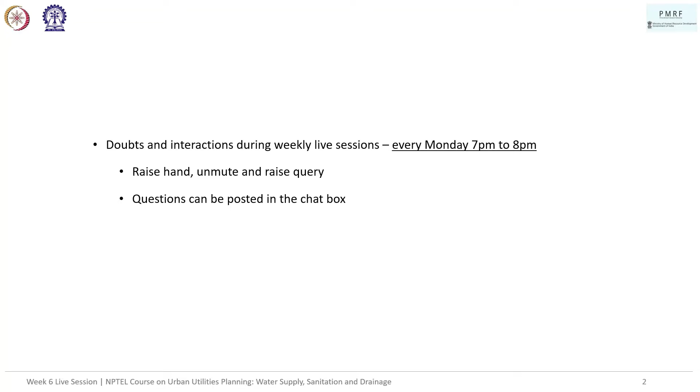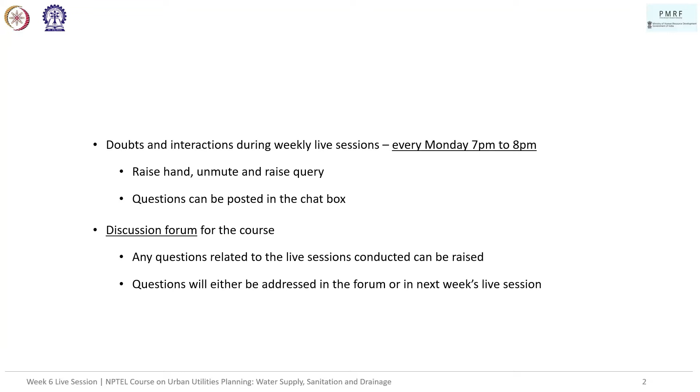So, a very brief recap of what happened in week 6 of the course, which was on water quality testing and treatment. The first two lectures covered concepts on potable water, impurities in water, physical and chemical quality of drinking water, bacteriological guidelines, recommended treatment for various sources, and sampling procedures for testing. We also looked at physical analysis, chemical analysis, and biological tests in measuring water quality.

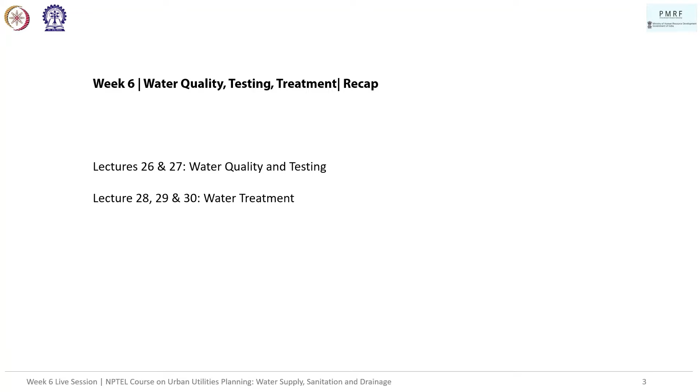The next three lectures focused on water treatment. We looked at treatment methods, sequence of treatment units, water treatment plants and their structure, and individual components such as screening, aeration, plain sedimentation, coagulation, flocculation, and clarification, as well as a third lecture on filtration, disinfection, and other treatment methods. We also saw a case study.

In this session, we'll be looking at a few assignment questions from the previous round of the course corresponding to the same week. This week it's been mostly theoretical, we don't have any major numerical questions. So I would request you to participate more in the class so that we can have an actual interactive session. Try to answer the questions.

Try to recall what has been taught in class, and even if you don't know, the great thing about water supply and sanitation that I personally found very useful when learning was that a lot of it actually depends on common sense. If you visualize it and keep a sequence in your mind, it's extremely easy to remember. So even if these interaction sessions aren't graded, just wonder what the sequence can be, or what the answer can be, or what the process of treatment can be, where it logically falls.

Then I think you would be able to answer both the ones here and in general pertaining to water supply, especially the treatment sequence part. So please make sure you send in your responses in the chat box so that it's easier for me to keep track also.

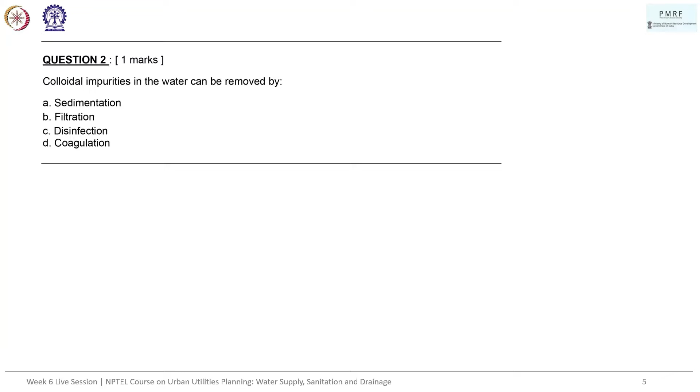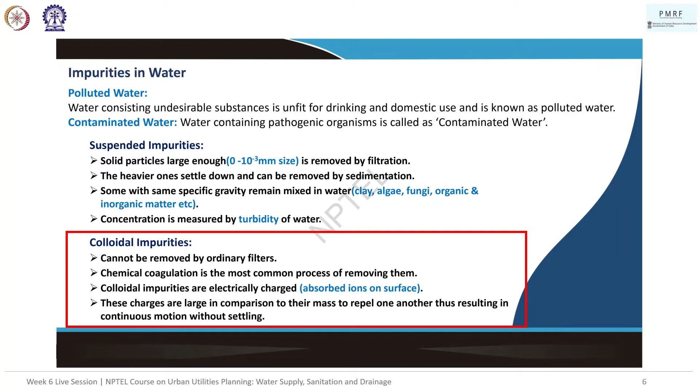So the answer, as we can see from the slides on colloidal impurities, is coagulation. You're both absolutely right. Coagulation basically depends on some sort of additional chemical being added, which is usually alum, and that's our answer.

The issue with colloidal impurities is twofold. One is their size, but even if the size is not the issue, it's about the charge that they carry. So even if you allow them to settle down, they will be in constant movement, similar to Brownian motion. These particles keep repelling away from each other because they're all of the same charge, and that is where the issue with settling down comes from.

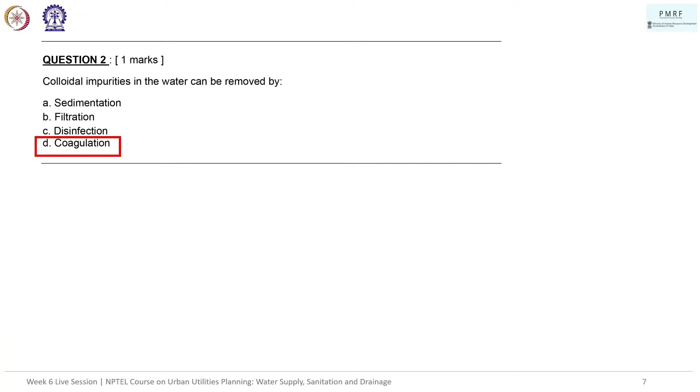Moving on to the next question. For this lecture, feel free to interrupt me anytime, since most of it is theoretical. I don't think we should have a problem with interruptions.

According to CPHEEO, what should be the acceptable pH of the drinking water? We have four options: 6.5 to 7.5, 6 to 8, 7 to 8.5, and 7.5 to 9.

C, 7 to 8.5. Okay. Anybody else?

You are absolutely right, Miss Supriya. The answer is 7 to 8.5. As Sir had also mentioned, there is a gray area between the acceptable and the rejection range. So 7 to 8.5 is the acceptable range, however less than 6.5 or more than 9.2 is the rejection range.

What happens is there is a gap between 6.5 and 7 - these are the tolerable limits. If you remember how Sir had explained, this gap is sort of not okay, but all right, let's tolerate this much of a deviation.

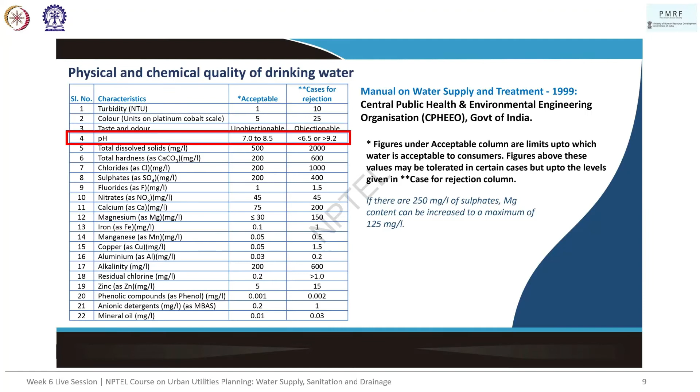We don't go beyond 8.5, I mean the maximum is 9.2. So usually alkaline water, what they refer to as alkaline water, is also within this range. But in the assignment question, the range given is 7 to 10, 7 to 18, 7 to 14, 7 to 15. So it was a bit confusing for me.

That's why - which assignment? Current assignment this week only, question number 15. One second, I'm opening the assignment, Assignment 6, week 6.

They're asking about the complete range of alkaline water - any water that is alkaline. So there is alkalinity - is it alkaline or not? Yes, 7 to 14 is alkaline, right? But what is the acceptable range within that alkalinity is 7 to 8.5.

I thought you meant - oh, generally there are people in marketing of water who claim alkaline water is good for you and package it as alkaline water. I thought you meant we were talking about that. But in general, when you talk about the range of alkalinity, it's 7 to 14 - that's the full range.

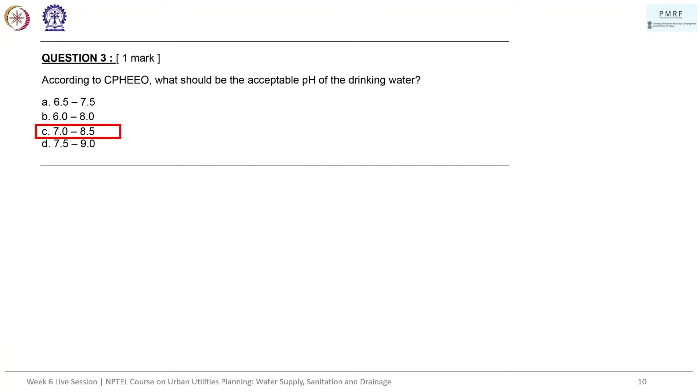The acceptable value and the range - yeah, full range is 0 to 14. Okay, got it, thank you. So next question.

Which physical property of water is measured by nephelometer? A. Turbidity, B. pH value, C. Total solids, and D. Taste.

Any answers? I guess it's turbidity. Okay, we have one answer, turbidity. Anybody else in the chat box? Okay, the answer is turbidity.

If you remember from the slides, we spoke about how nephelometers are used for measuring turbidity. It basically uses the intensity of reflected light to measure the degree of turbidity. But please keep in mind that nephelometers are actually available for both air and water. Essentially, nephelometry is the term used to refer to detection of light energy scattered or reflected towards a detector that is not in the direct path of the light transmitted.

So whenever you transmit light, the essential measurement logic is you measure reflected light - whatever is scattered by the constituent particles. That is how you essentially look at nephelometry.

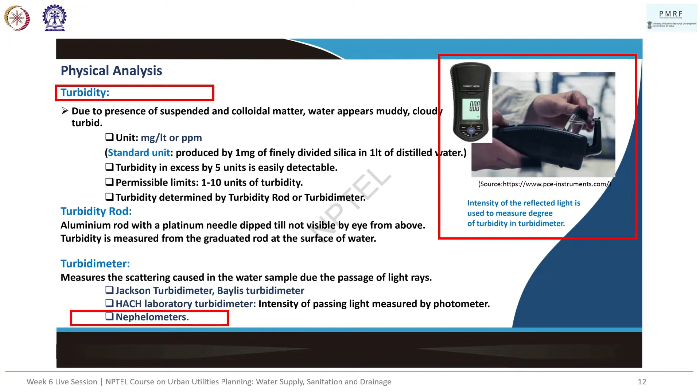Nephelometers have a provision where you can enter what type of particle you have in the suspension, but there is also a generic option where you can measure turbidity even without knowing what the cause of turbidity is or what kind of suspension it is. So the answer is A, turbidity.

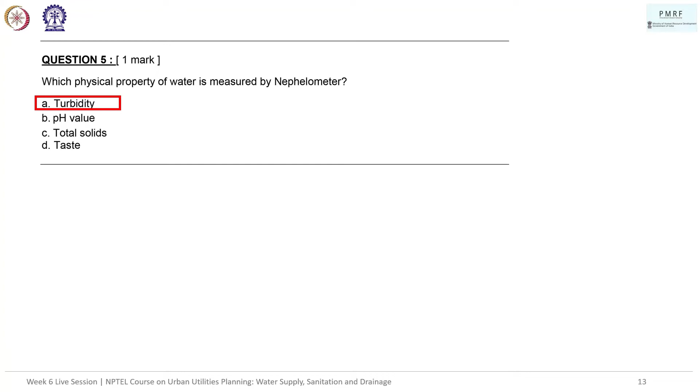So, can I get an answer for just photometer? What do you think photometer is actually used to test for? Color. Okay, color, yes, we have two answers, both right, absolutely right. We use it to test for color.

Let's go to the slide. Photometer essentially measures in platinum cobalt units. Whenever we are setting the standard unit for these measurement devices, even turbidity for that matter, the standard unit, like one PCU or one NTU, is measured based on some basic component that the international standard has set. In this case, platinum cobalt happens to be the standard used for measurement, so it's called platinum cobalt units.

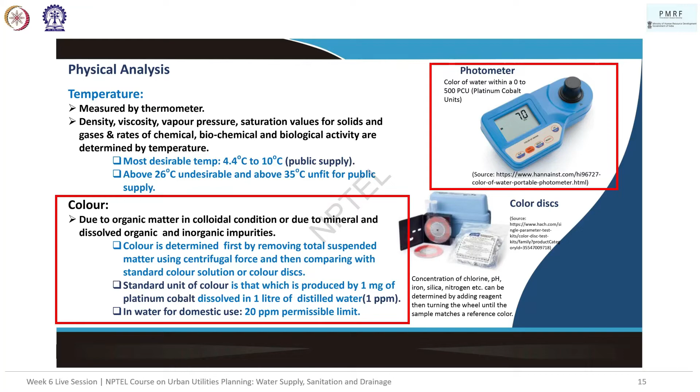The second part is the use of the starch iodide test for chlorine. This slide is actually quite uninformative in the sense that we don't know how a starch iodide test works, so let's take a look at what the test actually is.

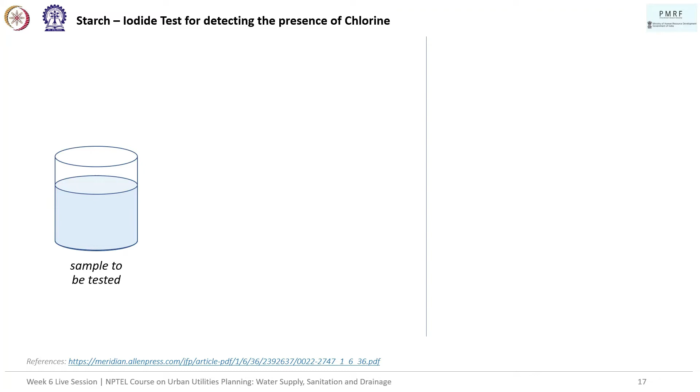Whenever you have a sample to be tested, what are you testing for? You're testing for the presence of chlorine. So you add a combination of some starch and potassium iodide into the water that you want to test for chlorine. If there is chlorine, the water turns blue. If there is no chlorine, the water doesn't turn blue.

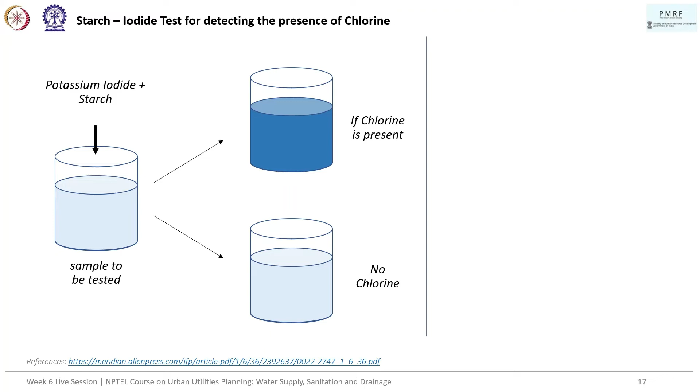What is the mechanism behind this? Essentially, when you add potassium iodide to water, if there is chlorine present, if you remember from school science, there is something called a reactivity series. Say there are two components, A and B, and if A is higher in the reactivity series than B, then if you introduce a compound of B into A, it will be replaced.

So in this case, let me take my pen. Chlorine is actually higher in the reactivity series than iodide - basically, its capability to react with anything is higher than iodide. So as soon as you add potassium iodide into the solution, if there is any chlorine present, the chlorine will replace the iodide. We'll end up getting potassium chloride salt, and we'll have ions in the water.

It so happens that whenever you have iodine ions and there is starch present, this combination gives you that blue color. So this blue color is actually arising from the emergence of the iodide component - I'm sorry, here it is chloride and iodide actually, because they're ions, so Cl minus and I minus.

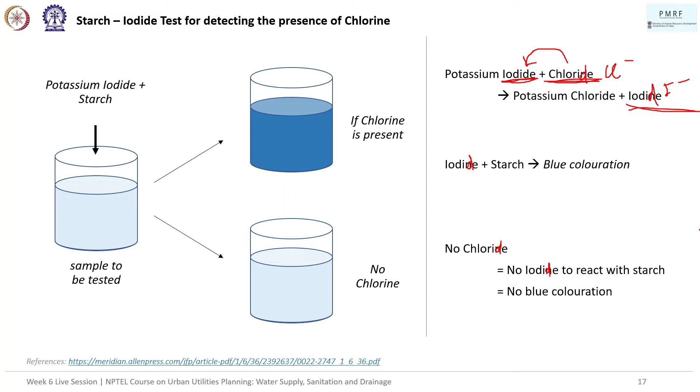When you detect the presence of chlorine, the quantity is further determined based on the number of ml of thiosulfate required to remove the blue color. So when you titrate, you keep adding thiosulfate to the solution till it stops being blue, and then you multiply it by 0.355. That gives the quantity of chlorine present in the water sample in milligrams per liter.

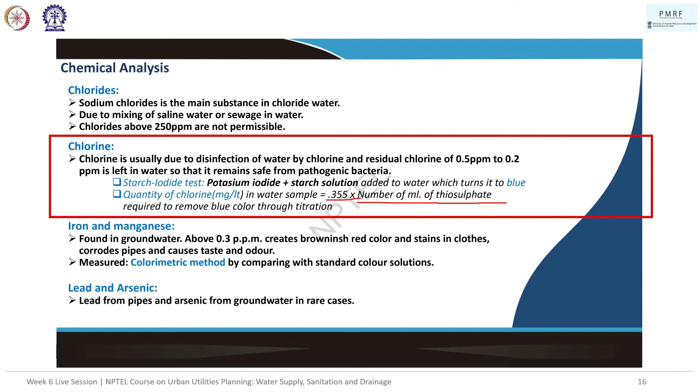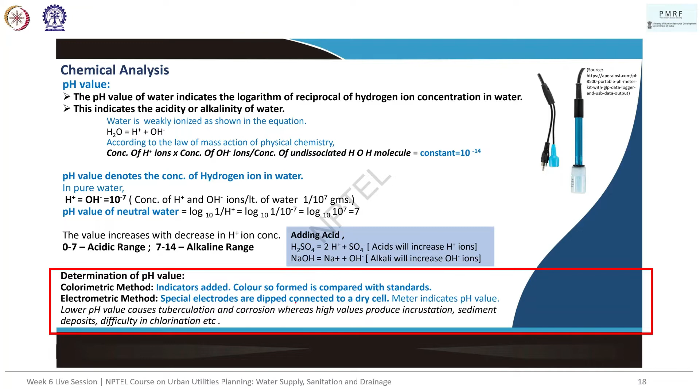So that's a basic introduction. pH is measured with the electrometric method, where you dip electrodes into the water and connect it to a dry cell, and the meter gives you the pH value. Dissolved oxygen is measured through a DO meter.

So, as you said, photometer is for color. Starch iodide test is to test the presence of chlorine, like we saw. Electrometric method is for pH, and dissolved oxygen meter is for oxygen. So the answer happens to be B.

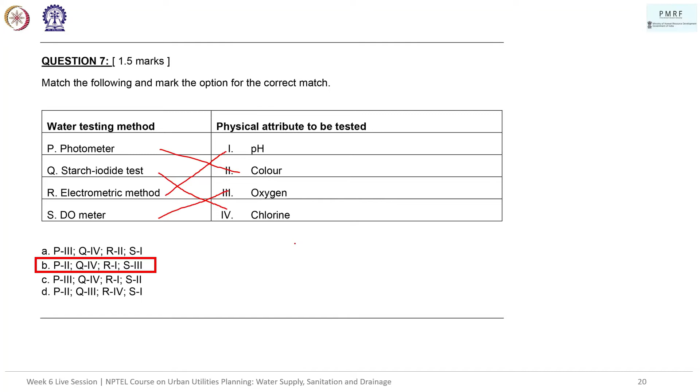Any questions till now? No, go ahead. Okay, all right.

Next question: the presence of nitrogen in water mainly indicates presence of organic matter and bacteria, dissolved gases, suspended impurities and ammonia, or organic and inorganic material. It's C, suspended impurities and ammonia.

Okay. Any other answers?

Let's look at what the presentation talks about. Nitrogen actually indicates the presence of organic matter and bacteria, which is also, by extension, living organic matter. So that's our answer for this question.

In fact, by figuring out what kind of nitrogen component is present in the water, we can determine what stage of decomposition is present, or how much oxidation has happened to this organic matter.

So we can have free ammonia, which indicates the first stage of decomposition or contamination having happened very recently. Then we have nitrates, which are allowed in a very small amount. Nitrites are absolutely not supposed to be present in water.

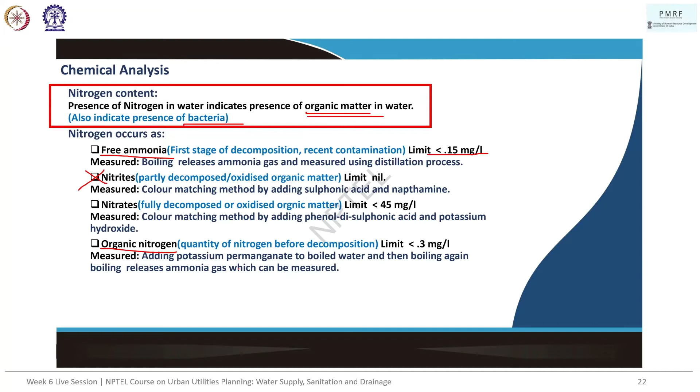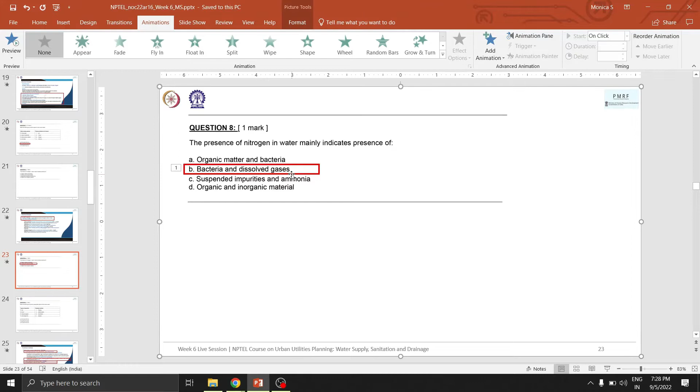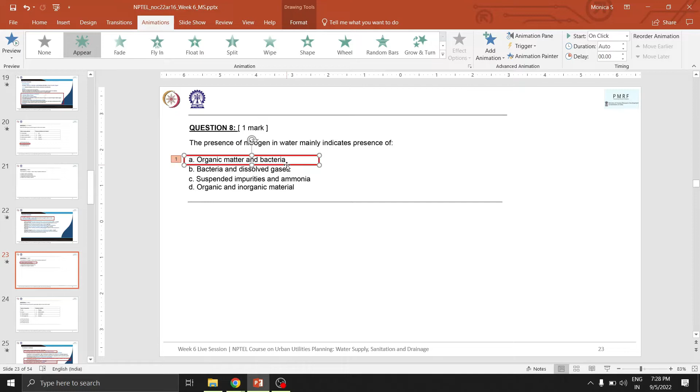Can you please go back to the slide you were explaining? I got confused. You said organic matter and bacteria, and then dissolved gases and bacteria. The correct option you said was bacteria and dissolved gases, right? Oh my god, one second, is it organic matter and bacteria only? One second, it is organic matter and bacteria. My bad, I thought I missed something. No, no, you're absolutely right, I think I just went on auto mode. It is organic matter and bacteria. No problem. After explanation, I can't believe I made that mistake, thank you for pointing it out. It is organic matter and bacteria. No problem, thank you.

So, moving on to the next question: match the following and mark the appropriate option for the correct match. We have four types of impurities that we're looking at and four types of treatment methods.

So, for silt, which treatment method do we use? Any answers? Or if you know any of the four, you can go ahead and tell me: scum, dissolved gases, or microorganisms. Any one of the four.

Okay, so we have one answer in the chat box. I assume that's for silt, right? Somebody has come up with sedimentation. Okay, so final answers are coming up.

So the answer that's been suggested is D. It's D only, right? Silt, sedimentation. Let's see the slides.

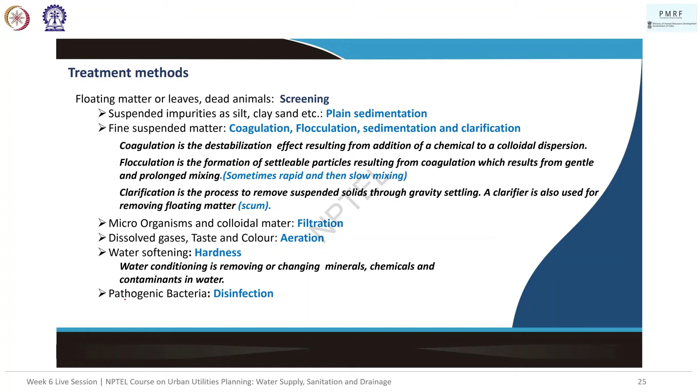This slide essentially summarizes all the treatment methods that we have. So silt is a suspended impurity at the end of the day, so we require plain sedimentation for its settlement. For scum, we require clarification, so essentially the clarifier is the one present in the sedimentation tank, the settling tank. In that settling tank, we have this scraper on top of the water body.

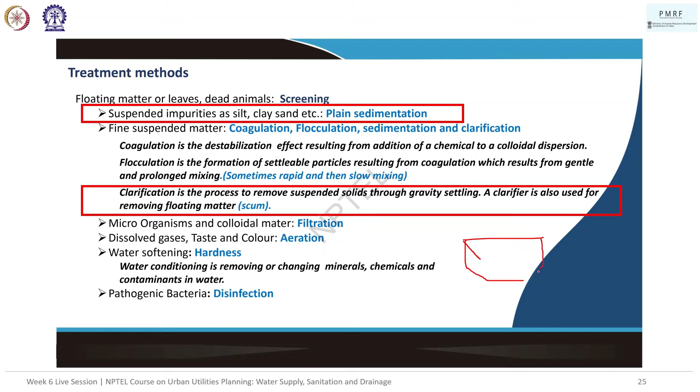Sorry, this should be longer actually.

If this is the settling tank, we have something like this on top, a sort of truss kind of system where it scrapes all the scum that is floating on top. So that's how the clarification process removes scum.

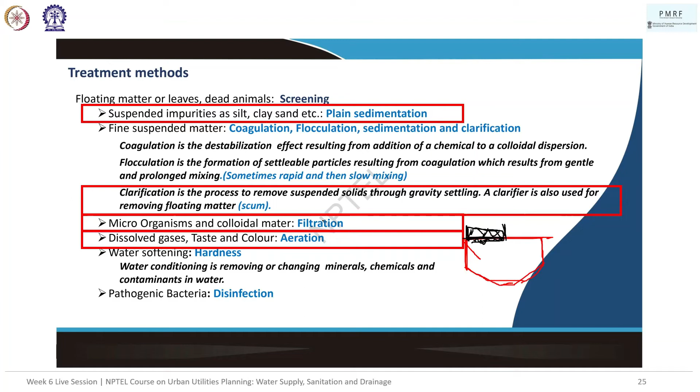And we have dissolved gases, taste and color removed through aeration, basically replacing the gases inside. Microorganisms and colloidal matter are removed through filtration. Sometimes it's not just a normal filter, some filters can be biofilters as well, where we employ a medium that enhances filtration of microorganisms present. So the answer is D, as all of you have pointed out.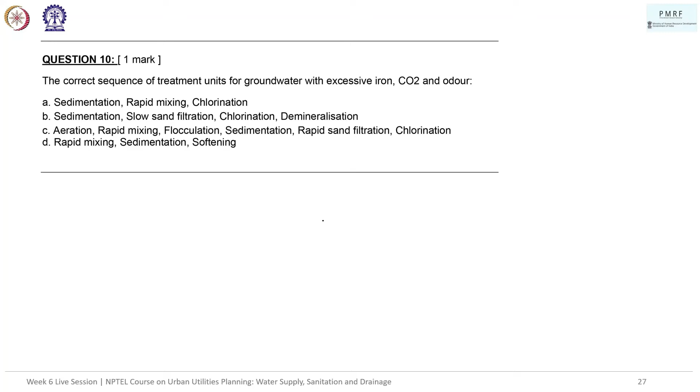If you look at the slide, this process is directly highlighted. We employ aeration to remove carbon dioxide as well as odor to a certain extent. And to be honest, aeration also ends up precipitating a lot of iron, which needs to be filtered out later or allowed for sedimentation. Because of aeration, some components like iron start sort of materializing in water. So that's the major process that's differentiating.

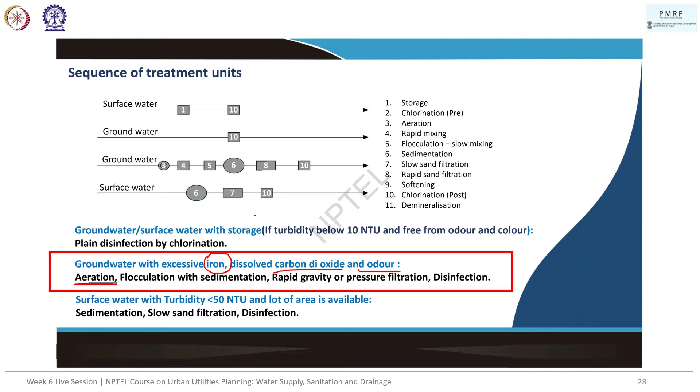All the others are components addressing the groundwater part, what is usually required for groundwater. So the answer involves aeration, then rapid mixing and flocculation, which will remove any colloidal or very small suspended particles. Sedimentation will allow settlement of these particles. Rapid sand filtration will allow disinfection essentially to a certain extent, as well as more filtration. Then we have chlorination for disinfection primarily. That's all. The key here is aeration.

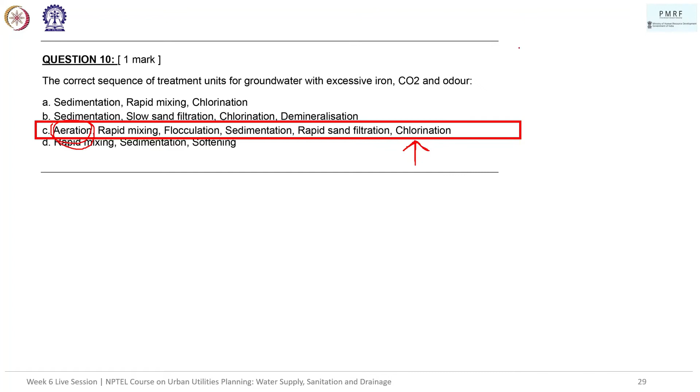Next question. Identify the water treatment units as shown in the figure. Can somebody tell me what A is? For A, we have two options: screens or plain sedimentation tank. Mr. Ashwin is telling us it's sedimentation tank, and Mr. Rahul is telling us it's screens. Okay, it's a screen. B will be sedimentation tank.

So actually, this is our source of water. We're taking water from the river, and we will be taking water in through a pump. Which means this is our intake point, and there is some sort of pump here. If you remember, screens are employed before pumping to remove all kinds of very large items. It's two pronged: one is the screen helps in treatment, removing big objects, but also ensures the pump is not damaged by the presence of these large things.

If you notice any of our rivers, we have all sorts of things floating there. So the screen will actually be employed somewhere here, because this is the pump. Screen is actually sort of pre-treatment, if I'm allowed to use that term. So the actual answer is A: plain sedimentation tank is the first component in the actual water treatment plant. The screen will be placed before the intake point or the pumping point. Which means the first one is plain sedimentation tank and not screen.

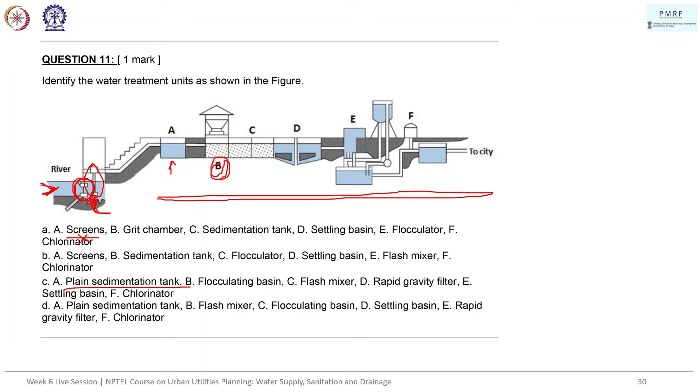The second one, B, what do you think it is? Do you have answers? We have flash mixer from one person. Any other answers? Flash mixer, yes, absolutely. So it is flash mixer where we'll be adding the chemical that enables further flocculation. That's the first step. Flash mixer is essentially one fan that will rapidly mix the flocculating agent into the water. So B is flash mixer, which means we have already narrowed down to option D. But let's look at the others also.

C will be the flocculating basin, if you remember. So this whole component is the coagulation-flocculation part, along with this part where sedimentation happens. So this entire thing is the coagulation, flocculation, sedimentation component. This part has mixing of the coagulant and the flocculating basin.

D. So usually in most diagrams, the next component, especially the one with this triangular scraper at the bottom, is a settling basin. Why? Because we have these scrapers to remove the sludge that gets accumulated at the bottom. The scraping happens here. I'm sorry about the drawing. The scraper will be somewhat here, it won't be this big, very out of scale, to remove all the settled components.

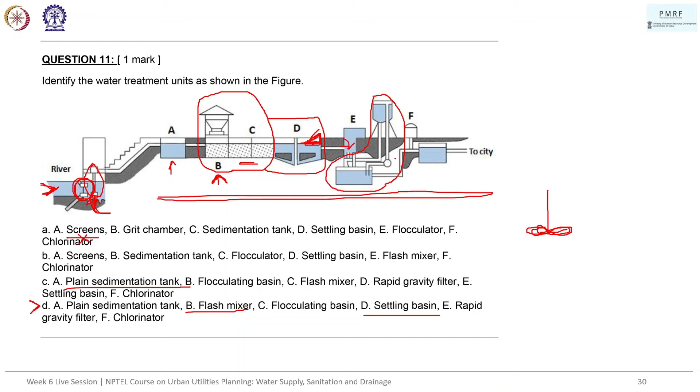So then we have E, which is the rapid gravity filter. For further filtration, water goes in, and F is the chlorinator, which adds chlorine before being supplied to the city. But can someone tell me what these two tanks are? The top one is used to backwash, and the middle one is filtered water. So for filtration we essentially have it as a backwash structure.

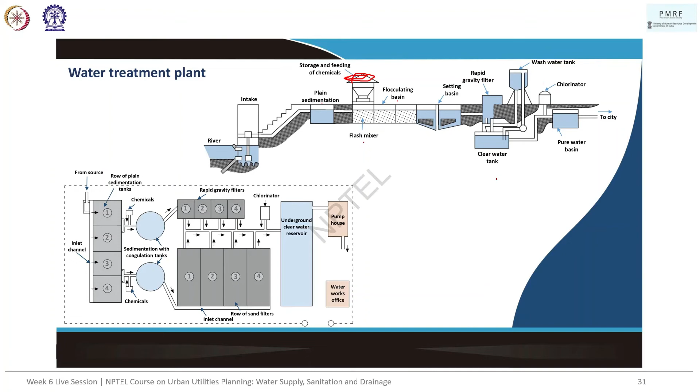So if you look at this image, you can see that this is the sedimentation tank, flash mixer, flocculating basin. This is the place where all the chemicals are stored, which helps us identify the flash mixer part. Settling basin, rapid gravity filter. The clear water tank is essentially just an intermittent storage, and it could also help in the further functioning of this wash water tank. And then you have the chlorine. So the answer is D.

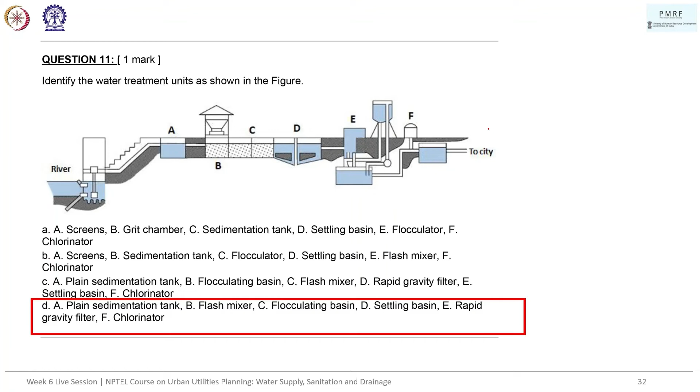Yes, as Mr. Rahul has also put in the chat box, right? Any questions till now? No, please go ahead. Thank you, thank you.

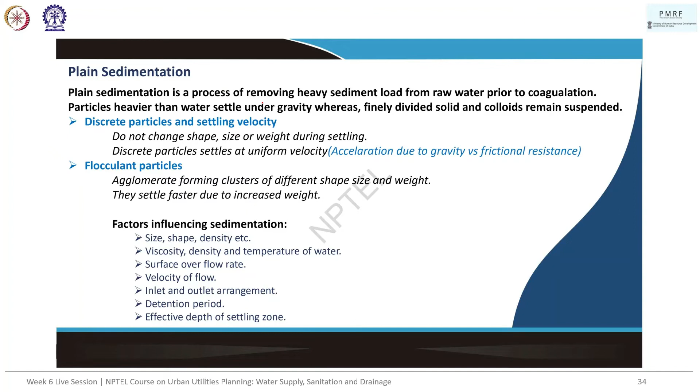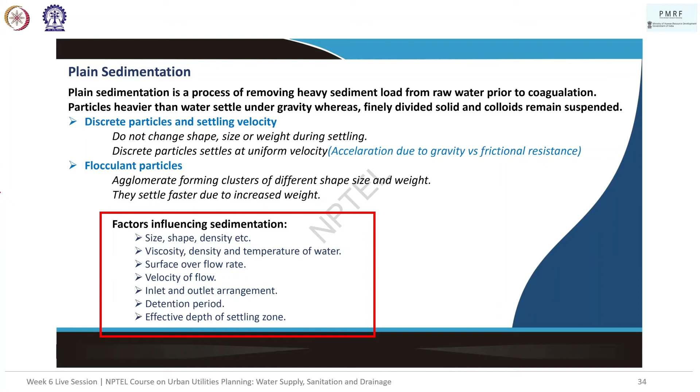Okay, so actually we are particularly looking at the process of sedimentation, which means we'll be primarily looking at aspects pertaining to the physical properties influencing the physical settling down of particles. So from the slides that were part of the main lectures, we can see size, shape, density, viscosity, temperature, surface overflow rate, velocity of flow, inlet and outlet arrangement, detention period, and effective depth of settling zone are relevant. Since pH is more of a chemical property of water, it doesn't directly influence this sedimentation aspect of water treatment.

So the answer is actually A, B, and D. That's where temperature determines it: colder the water, lesser the movement of particles. Hotter the water, more the movement of particles, which means sedimentation will be relatively more difficult.

Viscosity is essentially, along with density of water, going to determine how much the water is moving around. If it's a thicker, more viscous liquid, the movement of water will be lesser, which means there is more settling, also there is lesser movement of water. Any liquid with more viscosity will move with more difficulty.

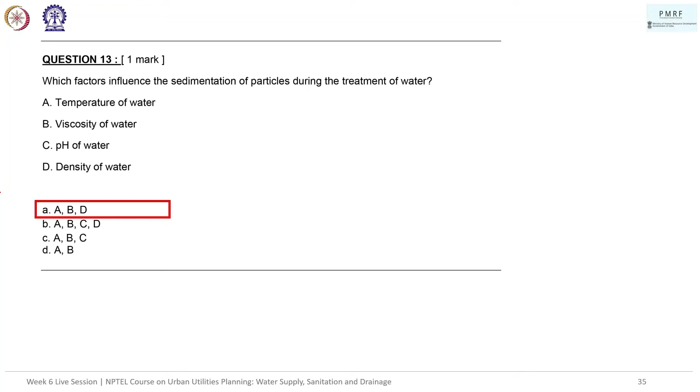The density of water again determines sedimentation, because the components that are going to settle down have to pass through the entire body of water. So if the water is denser, it's going to impede sedimentation again. But pH doesn't really have a direct effect on sedimentation.

Moving on to the next question. Identify the correct sequence of steps of chemical sedimentation. Options: feeding, mixing, clarification, and flocculation; feeding, mixing, flocculation, clarification; feeding, clarification, mixing, and flocculation; or feeding, flocculation, mixing, and clarification.

One answer, option B. And we have one answer D. B for Bombay. Okay.

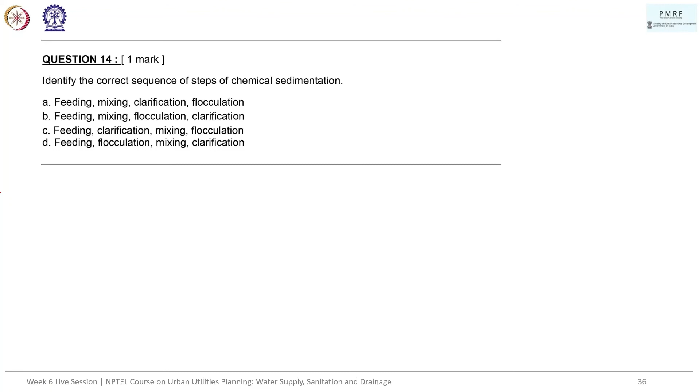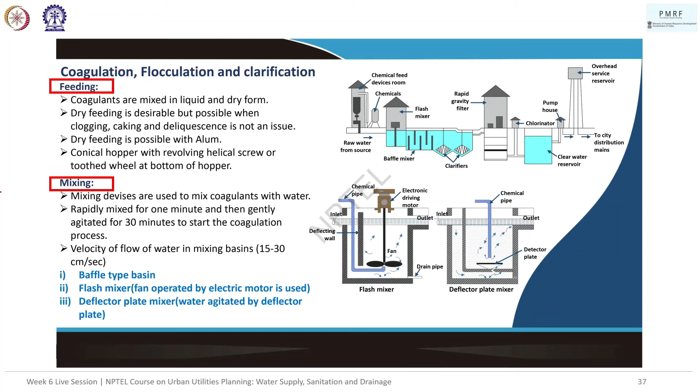From the slides we can see that it's actually feeding, mixing, flocculation, and clarification. So the answer is in fact B. This is a very direct theoretical question from the content that was presented in the slides.

Next question. A typical length to width ratio of a rectangular sedimentation tank design is: 3 is to 1 to 5 is to 1, 4 is to 1 to 6 is to 1, 2 is to 1 to 6 is to 1, or 4 is to 1 to 5 is to 1. Any answers? It's 3 is to 1 and 5 is to 1. Yes, any other answers in the chat box?

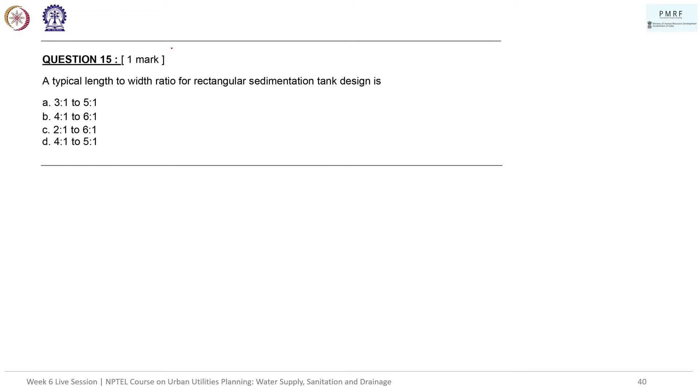Okay, yeah, you guys are absolutely right. So that's the answer. So the reason why we have such a... where is my...

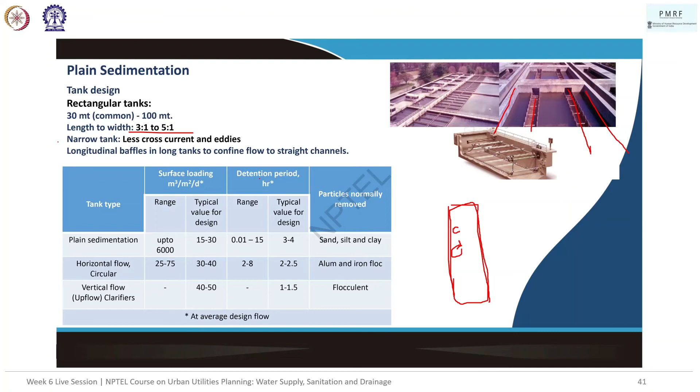The ratio is 3 is to 1, 5 is to 1. The linear nature of the sedimentation tank ensures there are no eddies or currents, because a broader tank enables circular movement within the entire stretch. If it's linear, the probability of eddies or currents forming is much lesser. So we also break down broader tanks into different components so that each linear stretch is isolated, and movement in one will not affect the other. Settling is also easier this way. So our answer is 3 is to 1, 5 is to 1.

Next question: Which statement is incorrect regarding sand filters? A. Depth of the sand bed should be between 60 to 90 meters - it's actually centimeters, right? Let's take that it's 60 to 90 centimeters. B. Sand media should be supported with a gravel bed. C. Effective size of sand particles in the sand bed in a slow sand filter is less than that of a rapid gravity filter. D. Rapid gravity filters do not require backwashing.

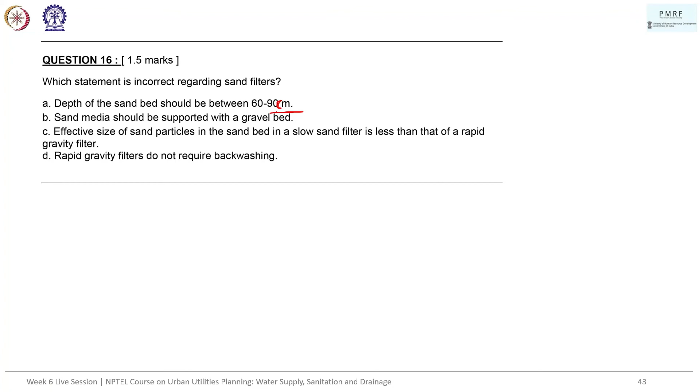You're right, Mr. Rahul. First of all, this is a typo, sorry about this - it's centimeters, otherwise both A and D would be wrong. From the slide we can see the depth of the sand bed has to be 60 to 90 centimeters, and it's usually supported on a gravel bed. This allows the water to pass through - it's like a mesh with additional gravel so that the sand doesn't pass through the mesh, and the gravel also provides a certain level of filtration.

Slow sand filters versus rapid gravity filters - gravity filters do have a larger size. Why? So that it allows the movement of water more freely. Otherwise, you will probably end up putting the system under a lot of pressure, and water will not come through if it's a very small size.

Let me explain this uniformity coefficient. Essentially, you have two values that you need to calculate. Whenever you have a filter medium, a bucket of sand that you're going to use for filtering, first you run this medium through a sieve - sieve number one - you decide the size such that 60% of this will pass through, meaning 60% belongs to this size of sieve or lesser. Then you take the entire thing again, mix it, and pass it through a second sieve. This time 10% of the particles, the grains of sand, should pass through. The uniformity coefficient is a ratio of S1 and S2. That's the uniformity coefficient, just to clarify on that point.

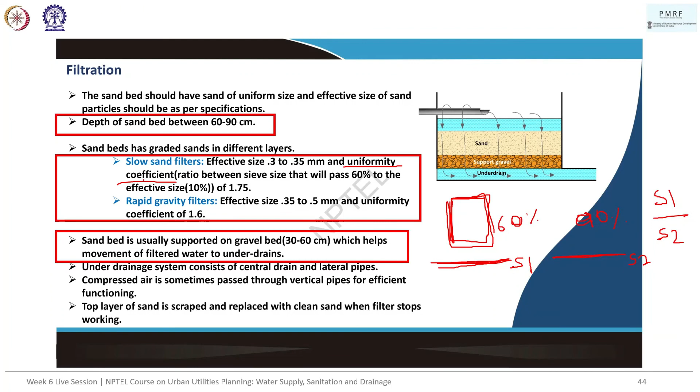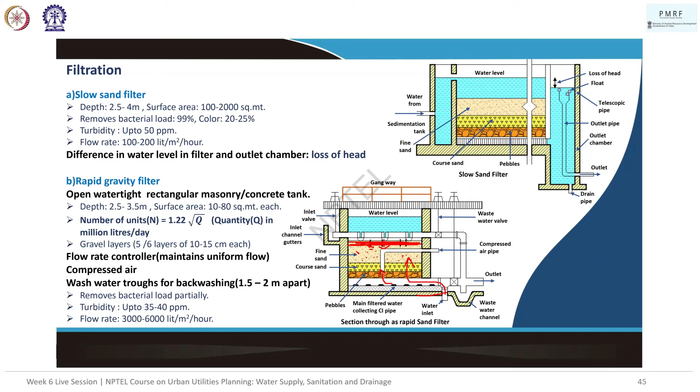That being said, the option states that rapid gravity filter does not require backwashing - however, it does. Why? Rapid gravity filter works under a lot of pressure. When you put this much pressure, sedimentation happens very quickly and gets deposited majorly on top, but also in between the particles. So what we do is send water through the other direction - after stopping operation, we send water through, like a reverse cleaning. We turn the system and send water through the other direction so that all the coagulants that have blocked the passage of water can be removed. This is the case in pressure filters also - they also employ backwashing.

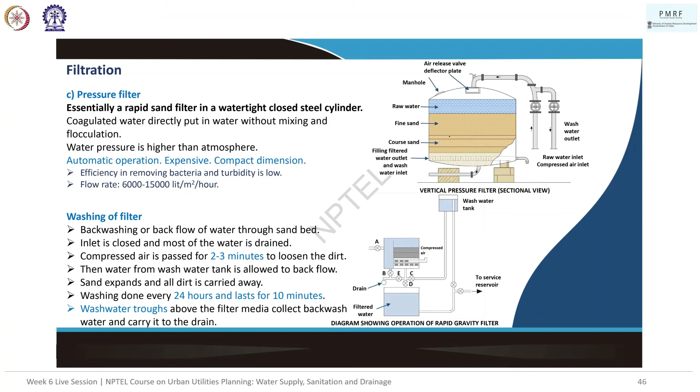So the answer is D. Sorry about the typo.

Next question: In rural areas, disinfection of water in wells and ponds is performed by adding A. Iodine, B. Lime, C. Potassium permanganate, or D. Chlorine. Chlorine.

And we have one answer in the chat box. Two answers. Yes, I see - it can be potassium permanganate also. So you've said chlorine, and we have three options in the chat box saying it's potassium permanganate. The answer is actually potassium permanganate, right?

If you remember the slides content, it's actually used in villages for dug well water. Even I didn't know this - I had to do a bit of digging to figure out why this is the case. Any day chlorine is a better disinfectant than potassium permanganate, and chlorine is also not too expensive. It's one of the cheapest we have - you just put bleaching powder and disinfection is done.

However, there are a couple of possible reasons why, from online sources. First of all, potassium permanganate is actually not a disinfecting agent - it's an oxidizing agent. However, it can sufficiently manage disinfecting against one particular bacteria, that is cholera bacteria.

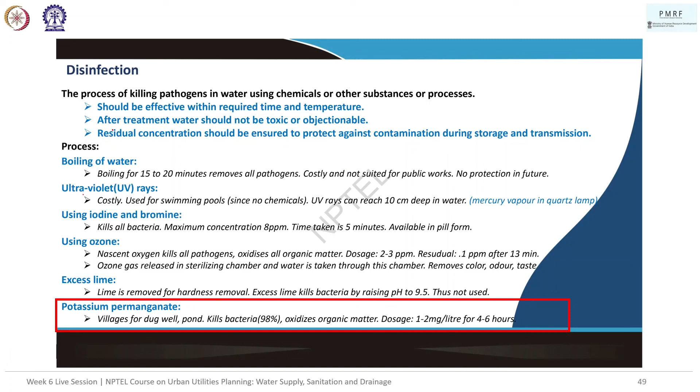Because of this comprehensive use that potassium permanganate gives, it's actually employed in villages, rural areas, for disinfection, especially where the source of water is a well. That being said, two points to note: in general, it's advised that potassium permanganate should not be used as a disinfecting agent. The question asks if it's actually used, which it is, but it's not really a good thing to do, and any day chlorine is a better agent.

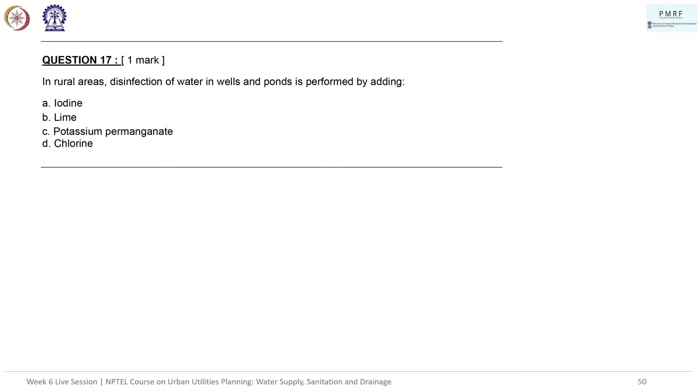So, moving on to the next question. Which treatment technique is recommended for the treatment of salt water? Again, a direct question from the lectures. A. Distillation. B. Fluoridation. C. Water softening. D. Oxidation.

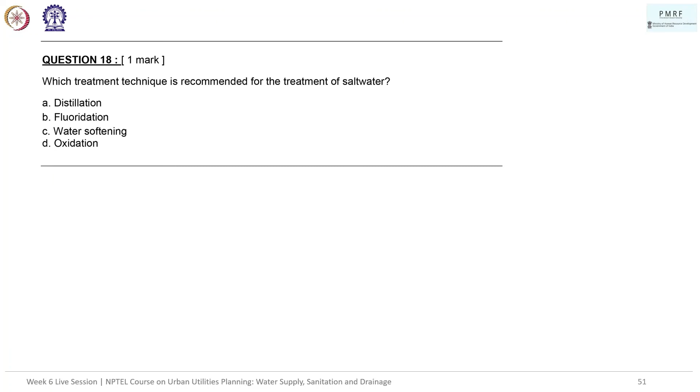We have answers in the chat box - A, distillation. Any other answers? Distillation only. All of you are absolutely right - it is, in fact, considered the best method for treating salt water.